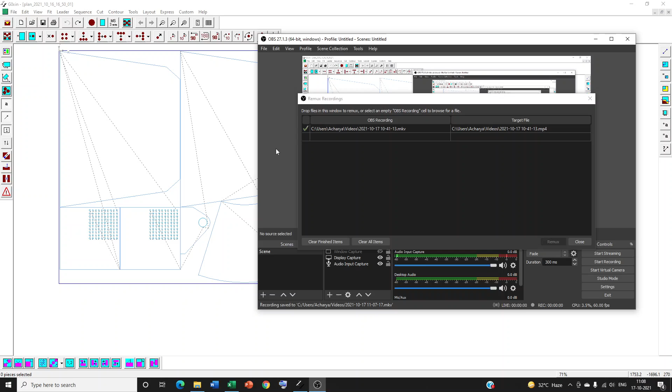Namaste. Let us find out how to attach lead in and lead out manually to all the pieces in a nested layout.

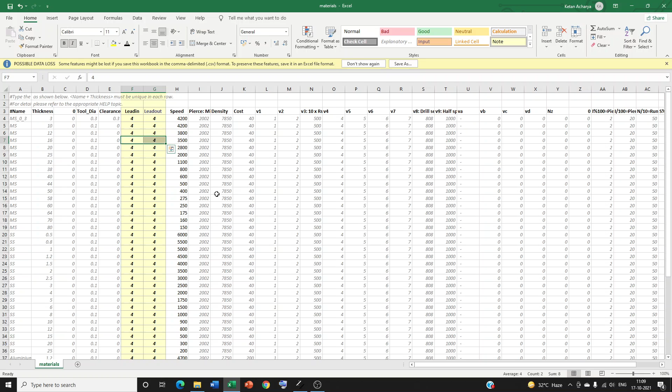You can add your own material grade and thickness along with the necessary cutting parameters. Description of material file is available elsewhere among the other documentations. Now let's go back to the main software.

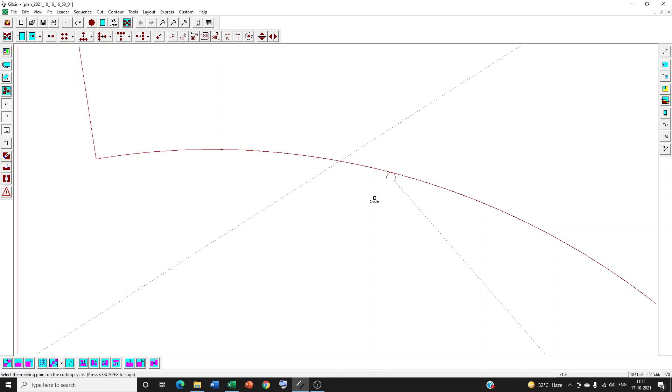No problem, whenever you select a point, you can right click to snap the point. So in order to snap the point in point selection mode, click the right mouse button, enable it, click on the end point, and now click on this point. You will see lead in lead out has come here.

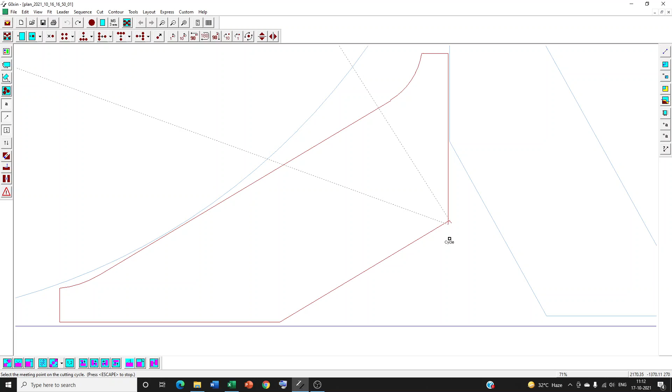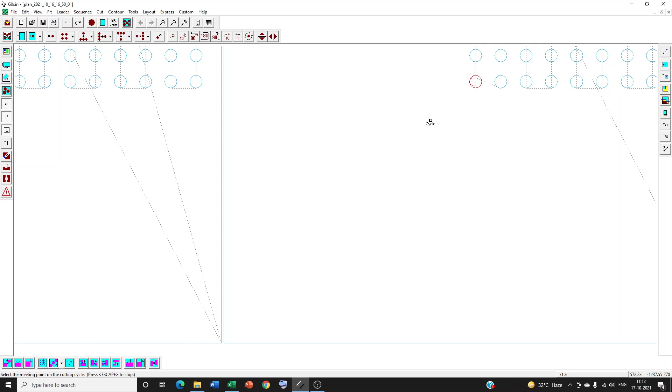The command is still active. Now I want to attach lead in lead out on the quadrant point of a circle. Right click, enable it, click quadrant here. Now I want to click on this quadrant point, click, lead in lead out is attached. I am going to press the escape key to stop this command.

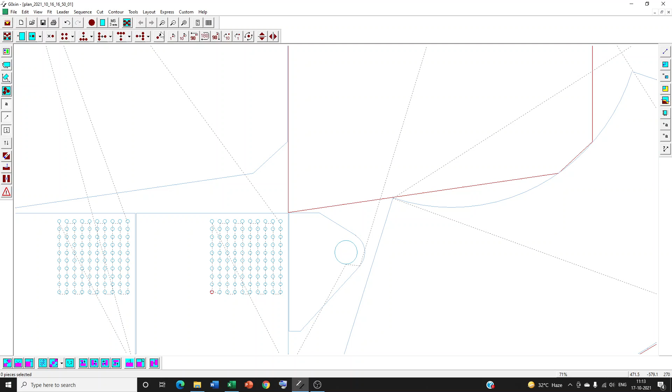So first what I will do is zoom in, go to this hole. I am double clicking on the common contact point of lead in lead out and body, and I'll say yes.

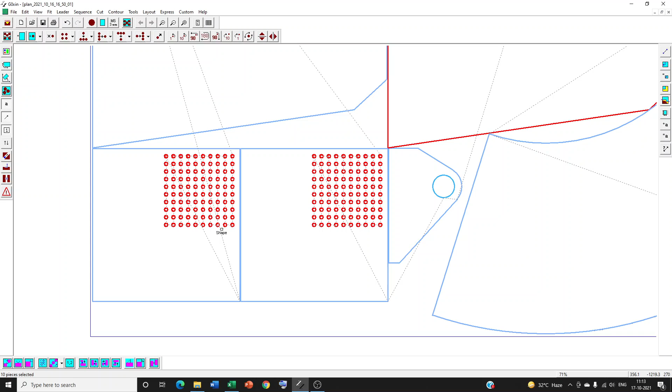They have not been copied onto this big circle because the diameter is different. However, be careful when you repeat the lead in and lead out in this manner, because when you repeat it all over the sheet, sometimes you may touch the lead in and lead out to a neighboring part.

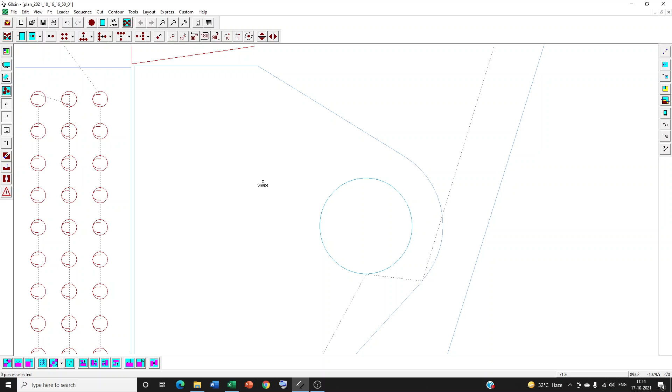There are several options. You can add lead in to a point at a corner. You can define radial leading. But right now, let us concentrate and learn about these three options: direction, line, and stock. Let's take them up one by one.

Suppose I want to define lead in and lead out along a specified direction. I'll say add lead in along a direction. I'll click here - that is my contact point. And then I'll click somewhere over here.

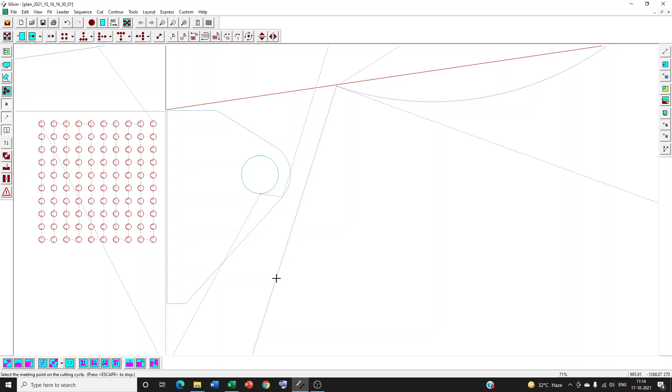Remember, I'm clicking far away from the contact point, but the lead in is taken closer. Why? Because it takes only the direction in this case. Length is taken from the default value.

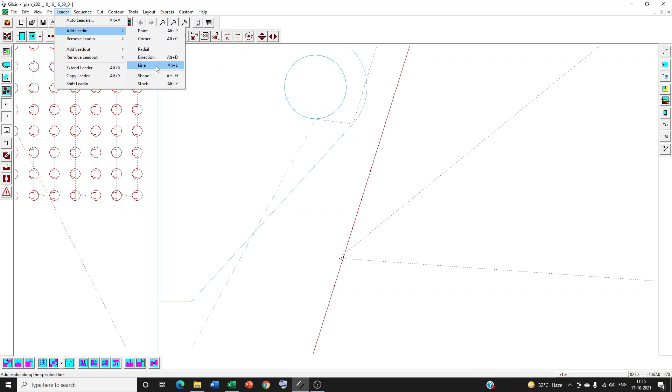But if you also want to change the length, then you should use this option where it will take length as well as direction from you.

Suppose I say I want to add lead in over here, and I click all the way here. Now I am clicking and you will see it's a long lead in. So here your lead in's direction and length, both were taken as per how you clicked. The software has taken the length of the lead in as well as direction from the point you clicked on.

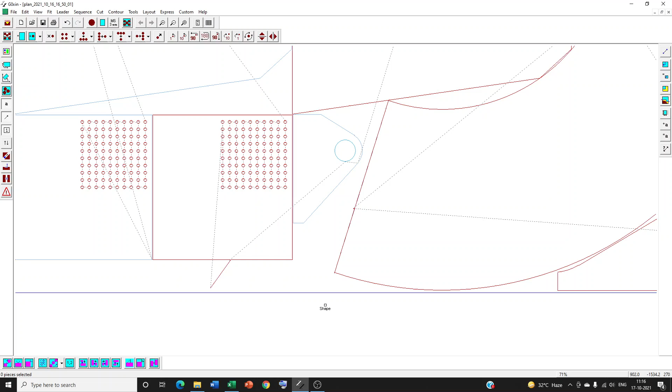So this is the difference between drawing a lead in along a direction and drawing a lead in along a line. Finally, sometimes you may want to optimize the cost associated with piercing. So in that case, you may want to take the lead in from the edge of the raw material sheet. Now, there is a very specific option available here.

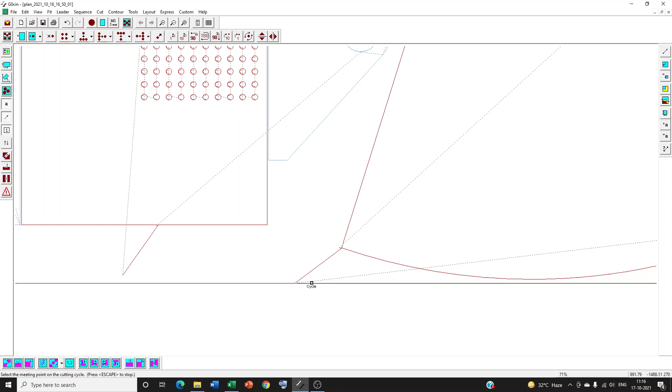You will click on that. I want to take it from the end point of this piece. So I'm clicking here, and then I am clicking on the raw material sheet. The lead-in is taken such that the piercing takes place on the edge of the sheet.

And there is a similar option. Let me press the escape key to break the command. There is a very similar option to take lead in from the edge of a part which is cut before. But here you need to keep in mind that this part should be handled before cutting the given cutting cycle for which you are adding lead in lead out.

Make sure that the part which serves as the start point for the lead in is cut before. This is necessary. For raw material stock, you don't need to think about this option. Raw material is never cut, and you can take the lead in from the edge of the raw material sheet if you want to reduce the piercing load.

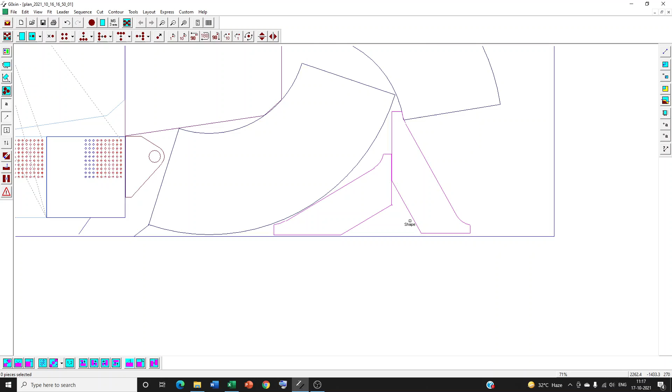There are some specific requirements which come up in certain cases. For example, you may want to stretch the lead in lead out - you may want to extend it. If you want to do so, select the corresponding command, say yes for extending the lead in. And I am extending the lead in here. Pressing the escape key.

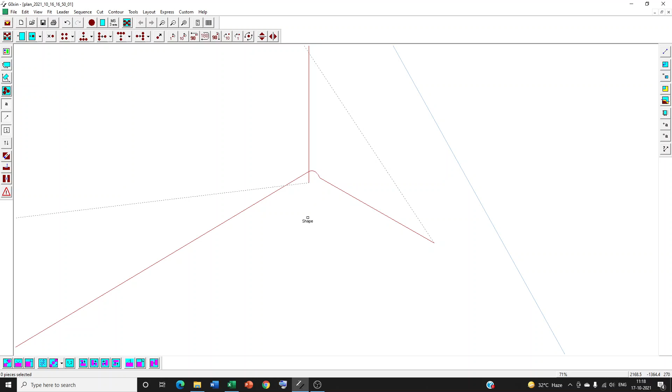The lead in has become longer. Similarly, you can extend the lead out. Just use the appropriate option once you click on this command. Say no in this case - I'm not going to do it, but if you wish, you can use this command as well for extending the lead out.

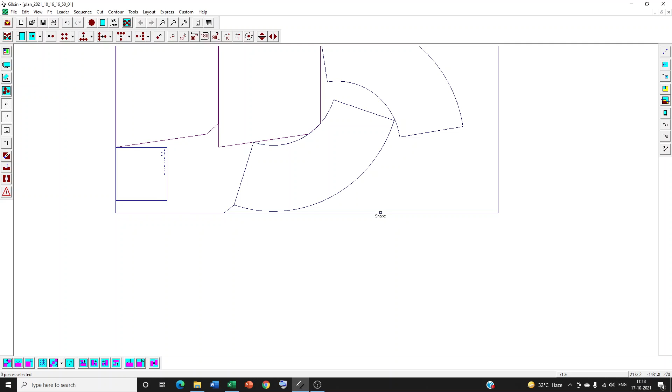Finally, let me show you how to delete lead in and lead out. See, there are two options available. One is to remove lead in and lead out from all the pre-selected pieces. Here I have selected two pieces, they are highlighted.

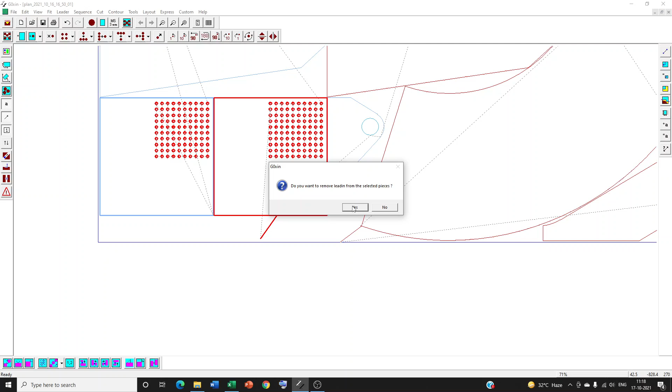And I want to remove lead in, lead out from all cutting cycles, holes as well as outer boundary. For that, go to remove lead in and choose the first one, automatic. Yes and yes. Everything turned blue - from both outer and inner boundary, the lead in and lead out have been removed.

But suppose you want to remove lead in from a specific cutting cycle. In that case, go here, say manual, click on the common contact point here. The one I selected, its lead in and lead out got removed. Press the escape key as usual to break the command.